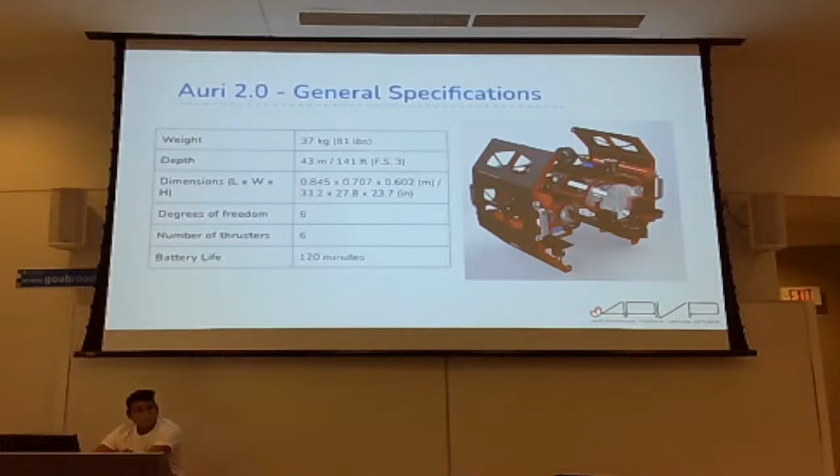How are the words? They're hard to see. Yeah? Okay, that was my main concern. Why is it turning red?

Wait, why don't we have a presenter view on this? Like on this, there should be a presenter view where you can see the notes on the side. Okay, yeah, but that's just the way you launch it. No, I tried to do it.

I'm gonna pretend you're presenting. I just want to check audio. This thing, presenter view. No, just like talking.

Oh yeah. Hi, my name is Lily. Yeah, you see how that shows up? That should be there regardless. Thank you. Hi, my name is Stevie.

I'm in my 4th year of mechanical engineering co-op, and I'm also the mechanical team co-lead this year. So these are our 2 robots, Auri, which is our existing competition robot, and Arctos, the new robot that we'll be building this year.

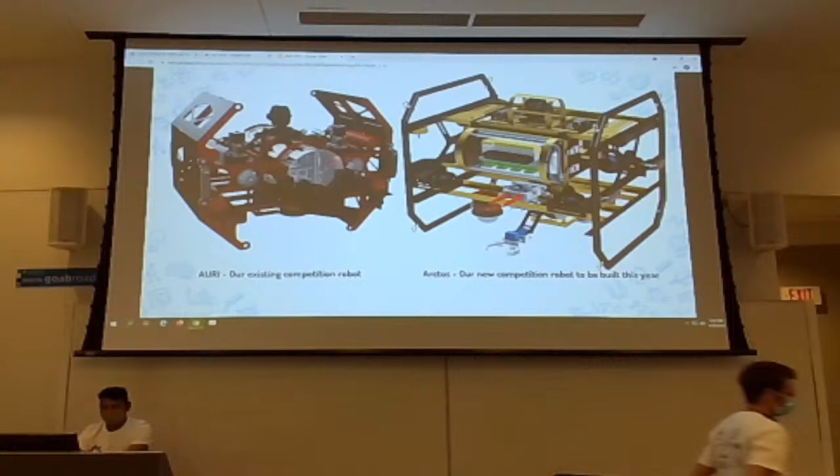Sounds okay, do you want me to continue? Okay, okay, so it's working?

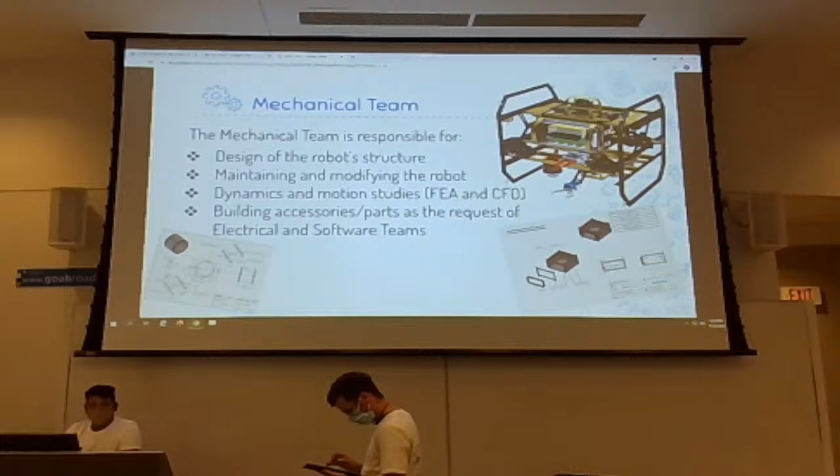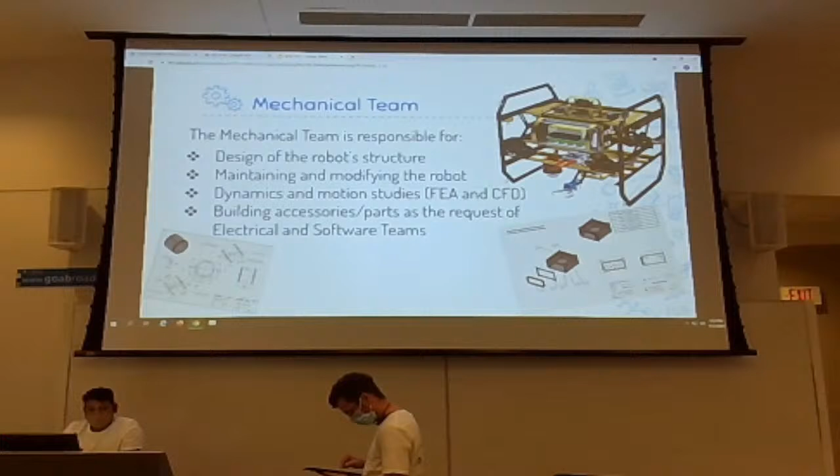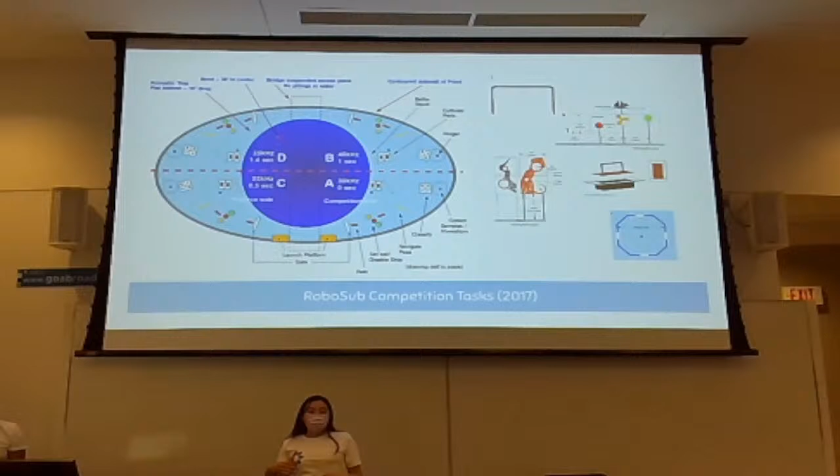The first task is always some sort of gate that you have to go through. However, every year it changes whether the gate is smaller on one side, bigger on the other, or there's 2 different colors. The next task is usually a buoy task. Some years it's been hitting a certain color in a certain order, or hitting 2 dice that add up to a certain number, or hitting the correct picture. So you can see our vision system is very important for that.

Afterwards, there are sonar pingers under the water leading us to the next task. Here we have a choice. We could either go one route to a pinger with a certain frequency that takes us to the torpedo task, where our robot would shoot torpedoes at targets. Or we could take another route and go more of a manipulation task, where we have to pick up an object from the bottom of the pool, or move a lever, stuff like that. To end the run, you surface in an octagon shape, and that ends your run. Or at any point, if your robot surfaces the water, your run is over.

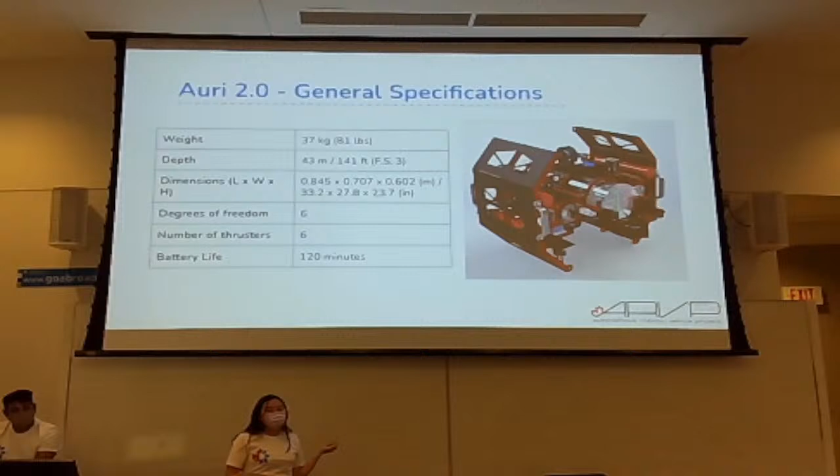So the robot itself, what do we build? This is our past robot. We are retiring it this year. This is Auri, you can see some of its specifications here. This year we're going to upgrade it and build a completely new robot named Arctos.

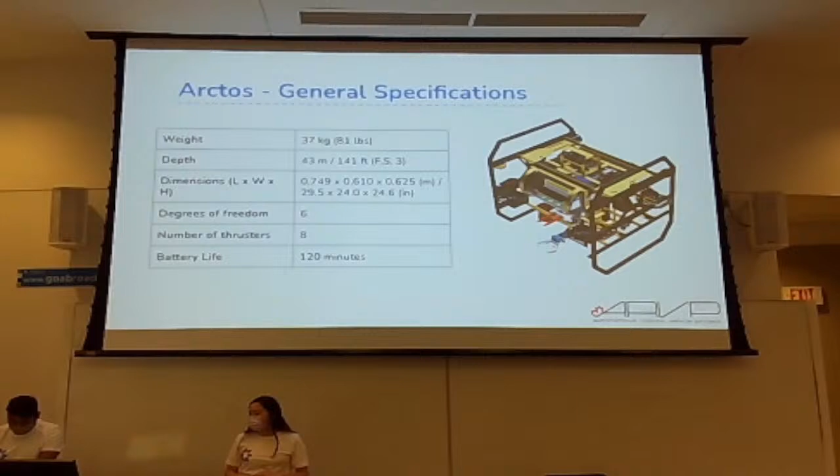You can see we upped the amount of thrusters it has, so it can go faster. It's also more stable.

So you can see that our club generally does pretty well. This is the results from 2019, and you can see that we placed 4th out of 58 international teams, which is pretty exciting. We are competing against teams like Caltech, MIT, Singapore, so lots of international big names.

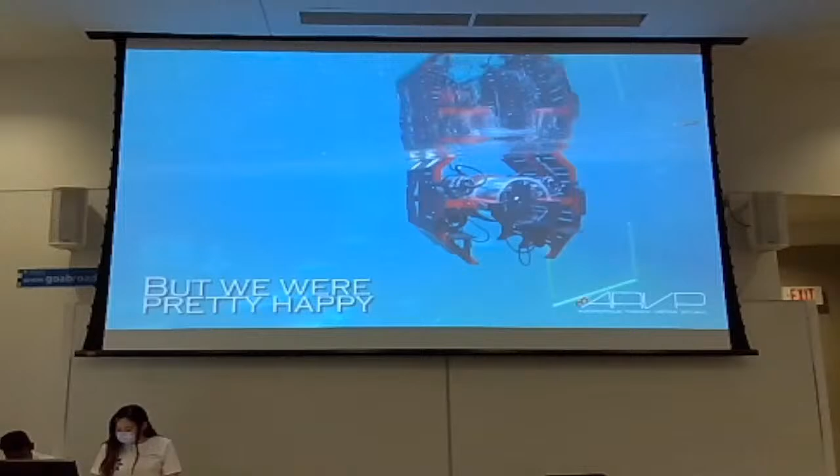Yeah, so you can see that was our run in 2017. We have done much better and done more tasks than what you saw there. So you can see this is our team at RoboSub 2018. It's a lot of fun.

So our robot is completely student designed and built, and we have 3 core teams: mechanical, electrical, and software. And then the backbone supporting all this is the admin team. I'm going to hand it off to the mechanical team to tell you all a little bit about what they do.

All right, awesome. Thank you guys. Thanks everyone for being here. Yeah, I can finish one of those. Just a second. Okay, press the arrow. Yeah.

All right, hello everyone. My name is Drew Del Cioco. I am one of the 2 mechanical co-leads for the 2021-2022 season. I'm in my 5th year of mechanical engineering here. I've been a part of ARVP for the past 3 years, one of the mechanical team leads for the past 2. It's been one of the absolute highlights of my university experience, and I would not trade any of these fine people or this club for the world.

I'm Stevie Demeray. I'm the other mechanical co-lead. I'm in my 4th year of mechanical engineering and 3rd year with the club as well. This is my 1st year as co-lead.

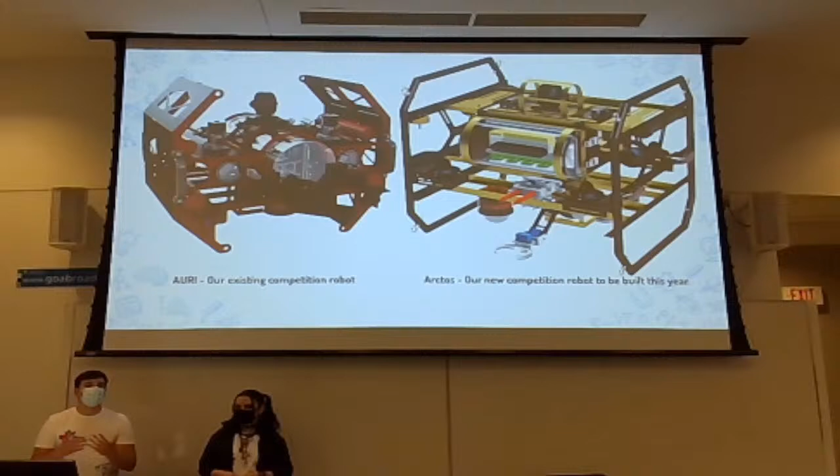To hopefully get this all working in time for competition next year, we also have a couple of other assemblies that are new this year: a cooling system, a balancing system, new droppers, new torpedoes, new everything. It's been super fun working on this for the last couple of years, getting this to the point where it's in now, I guess.

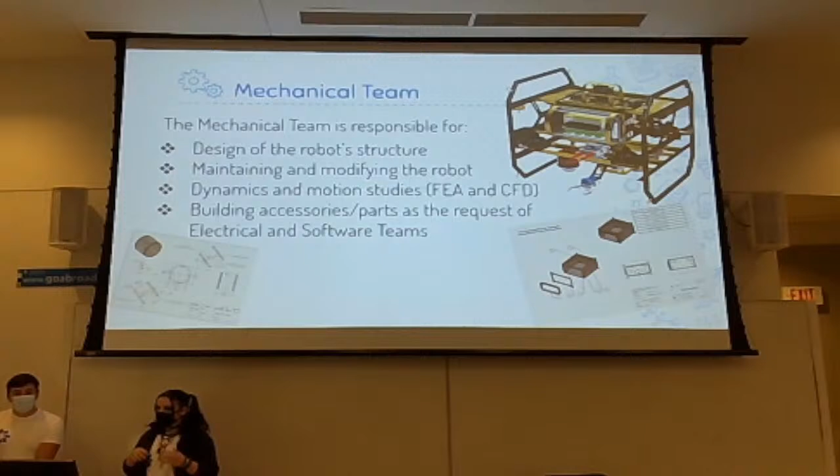So the mechanical team is responsible for the physical components of the robot, including the structure, such as the frame and hull, as well as the auxiliary components, such as the mechanical claw, the droppers, and the torpedoes.

Mechanical team is also responsible for maintaining and modifying current systems in means of continuous improvement to get the best competition results possible.

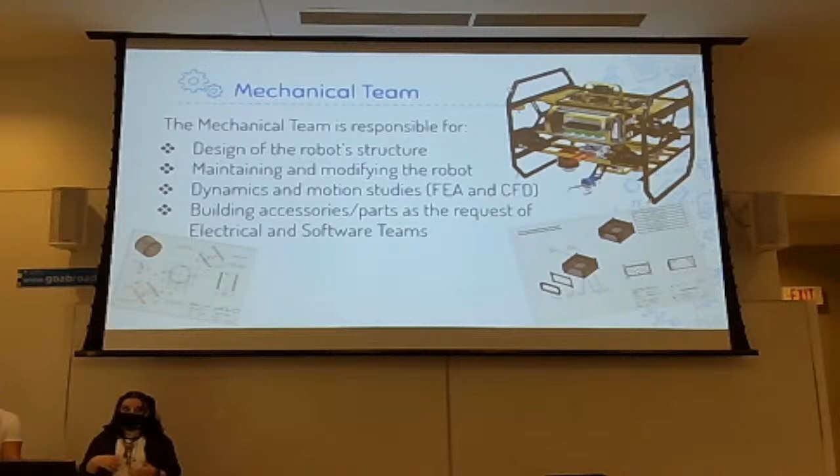So this year, our team is working on finishing up designing and building Arctos, including adding in a few new subsystems with the cooling and balancing system, and modifying some others like the claw and torpedoes.

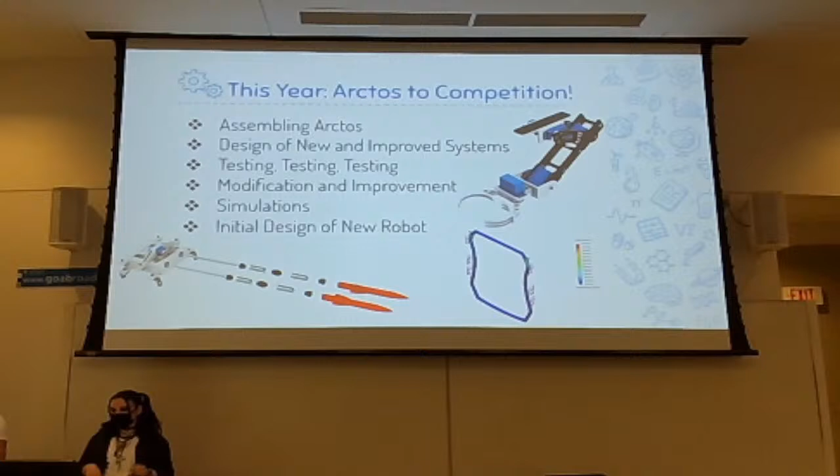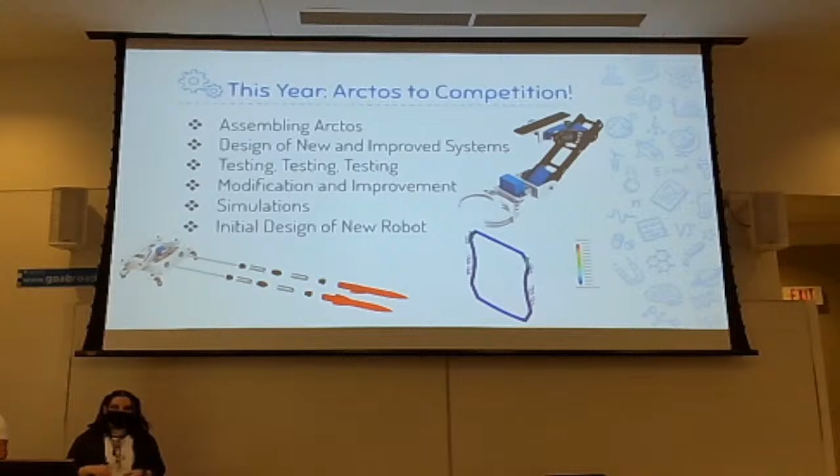We will also be putting the robot through a bunch of testing to iron out flaws, and we will also be starting the design on our next robot this year, later on this year.

Awesome, thanks. So guys, you're probably thinking, all of you guys have spent all of this time during your university career building robots and stuff like that, but I'm not sure that I quite like that. What am I going to get out of this club?

Of course, we have a great team of individuals that help each other with homework, that are able to hang out together, and I've made a lot of lifelong friends throughout my experiences with ARVP. But as far as your future engineering career, you probably want to learn something. You want to learn the fundamental engineering skills that will make you a successful engineer.

For mechanical specifically, oftentimes this comes down to stuff like SolidWorks. SolidWorks is very foundational. You take a big course on it, MEC E 265, and I can't even explain to you how many hours I've spent in industry just trying to build things on SolidWorks, trying to build very complicated things.

We also do a lot of manufacturing, using a lot of different manufacturing processes. This can be anything from laser jet cutting to 3D printing to anodizing, the whole works of it. It's very important that when you're designing stuff, you want to take into account how exactly this thing is going to be manufactured and what manufacturing processes can be used to get the most effective result possible.

We also really have a strong focus on the actual fundamental mechanical design process. This is going to be the thing that you're probably going to be spending a fair amount of time in your co-ops learning. I'll go over that probably on the next slide.

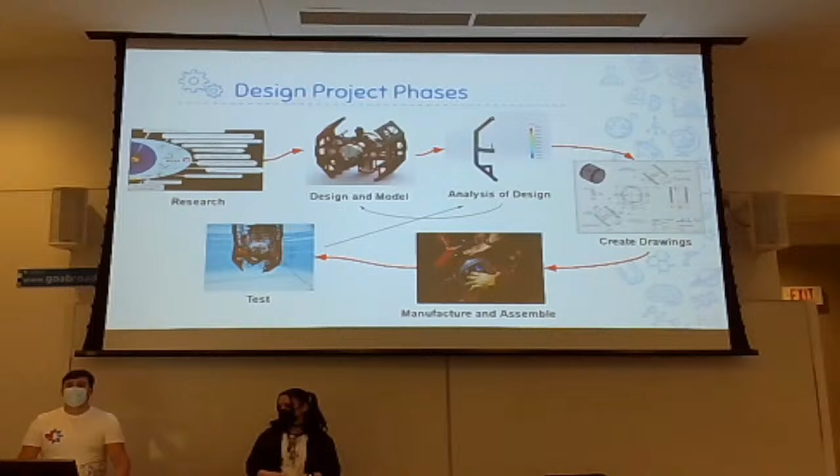Hey everyone, I'm Kirill. I did electrical nano, so if you have questions about the nano option in electrical, you can ask me. I'm also the electrical team co-lead with this guy. Hey guys, I'm Kang. I'm a third year electrical engineering student, and it's my second year joining this club, and it's been pretty great.

As part of the electrical team, there are three main components. You're designing and building printed circuit boards, which are those green boards you've seen with a bunch of components on them, for those who don't know. Then you're managing power and communication wiring, so that's physical troubleshooting and connecting. And you're also developing and maintaining code for microcontrollers, so firmware, for those of you who are familiar with that.

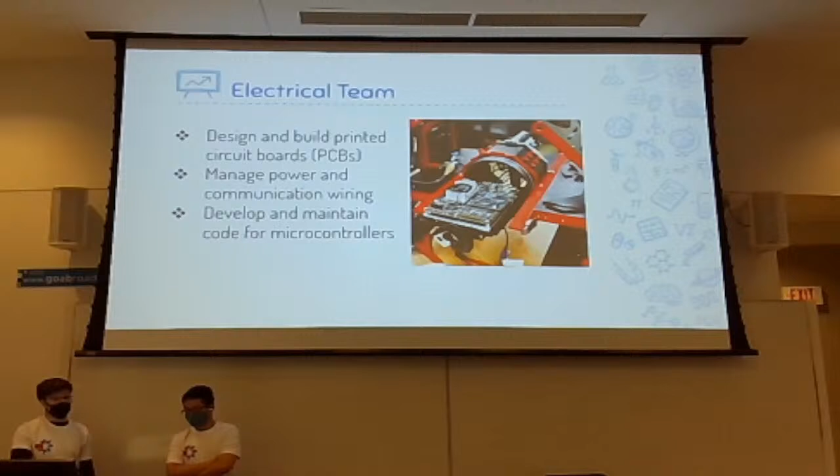For the electrical projects coming up this year, mainly we're focusing on assembling Arctos. We had a bunch of boards ordered before COVID, but then they never got assembled, so we have to assemble and test them before moving on to newer projects. We have one major research project, the underwater acoustic modem, which is worth a lot of points in the competition, but correspondingly is very difficult to implement. And we have one project right now, which is the Ethernet connection for our Sonar board.

We're also improving our documentation, which you're probably not that interested in. So this goes to learn embedded system design, basically integrating different boards, different controllers, electronic components, PCB development and assembly, firmware programming, and soldering. Soldering you probably won't use that much if you go into industry, but embedded system design is a major field of electrical engineering, so if you're interested in that, then by all means you should join.

The tools we use: Eagle, we use that for PCB design. We use LT Spice for simulation to make sure that the board works before we order the parts, and GitHub we mostly use for like backup. It's not like software where they use it for feature development, but you still get to use it.

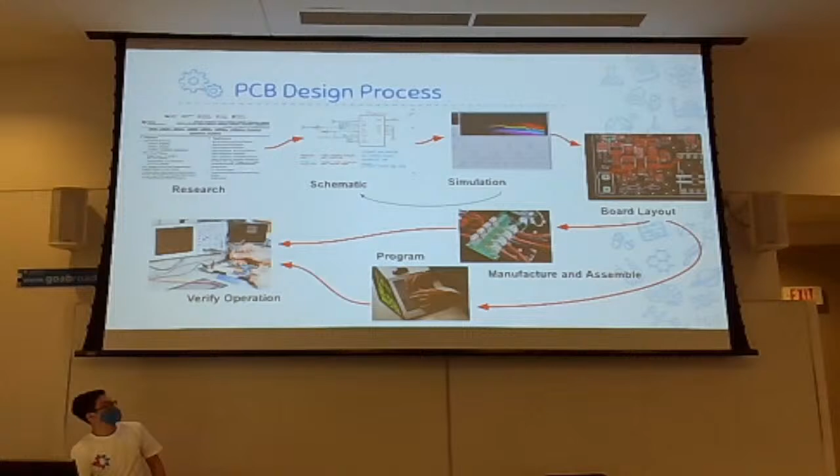As mentioned, we learned about the PCB design process, which I think is pretty interesting. So here are just a few steps in the whole process of designing a PCB. The first thing you need to do is research all the parts and components you will be needing as per your design requirements.

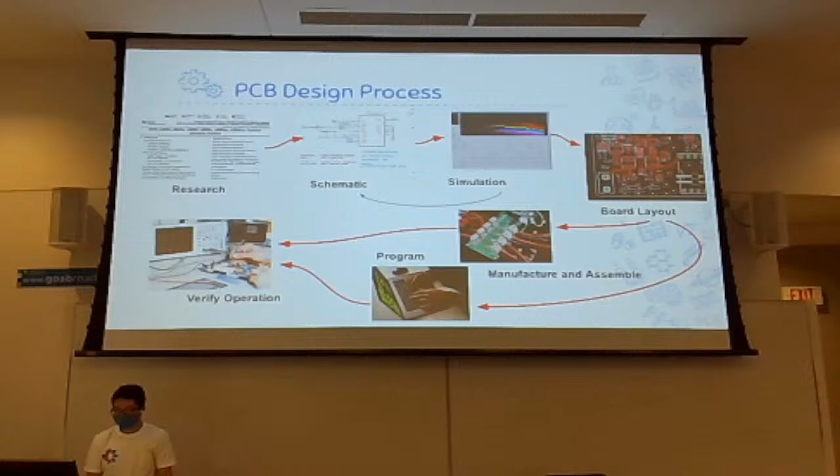After gathering all the information and parts needed, you move on to the second step, which is generating a schematic. A schematic is just a sheet on Eagle that you put a bunch of components on and make some general connections. Then after that, you do some simulation to test if your circuit works as expected or not. If it does, you move on to the next step, which is the most exciting step, which is making a board layout.

So here, just like placing actual connections and traces on it, it has to adhere to some signal integrity design rules.

After finishing the board, you send it to some manufacturers to manufacture it. Then after it's manufactured, you solder, basically putting a bunch of components onto it. After that, we verify some connections, operations, and functionalities. And then I guess the last step is just to program it as per requirement.

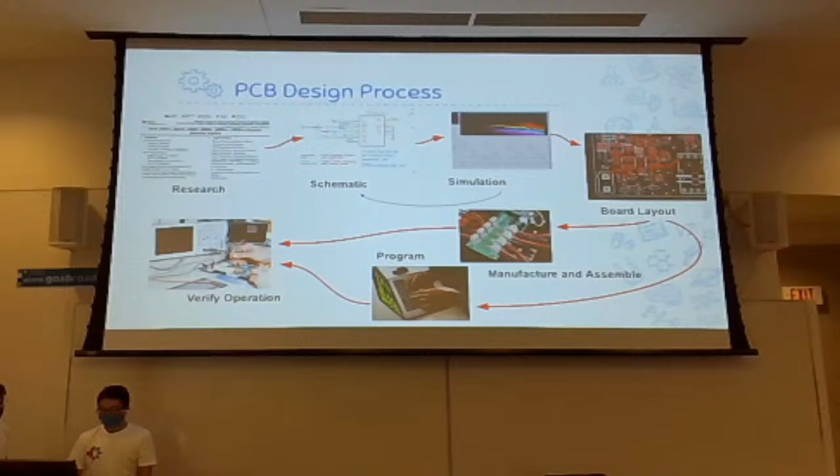So, yeah, now we're gonna pass it off to the software team to test it. Sounds very good.

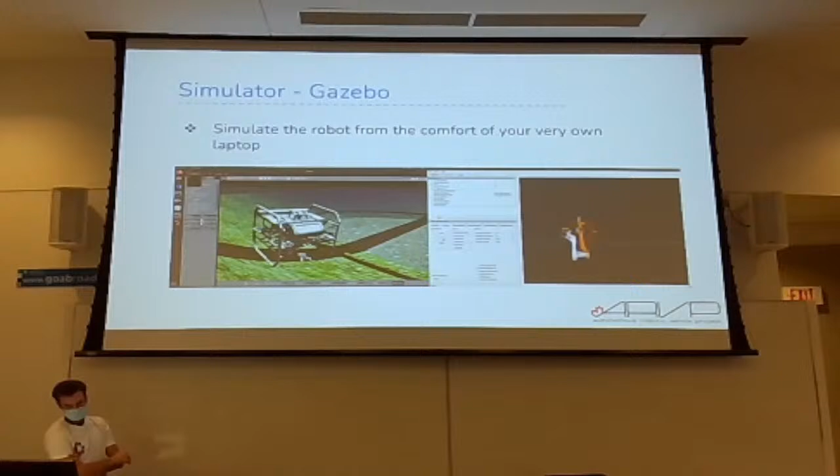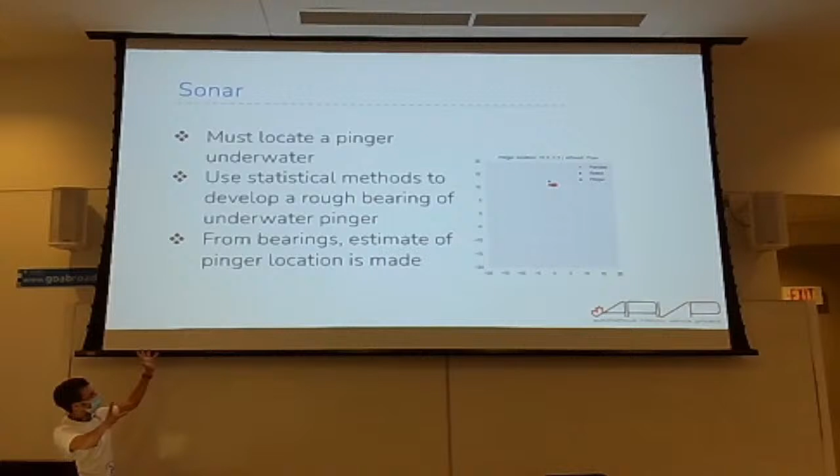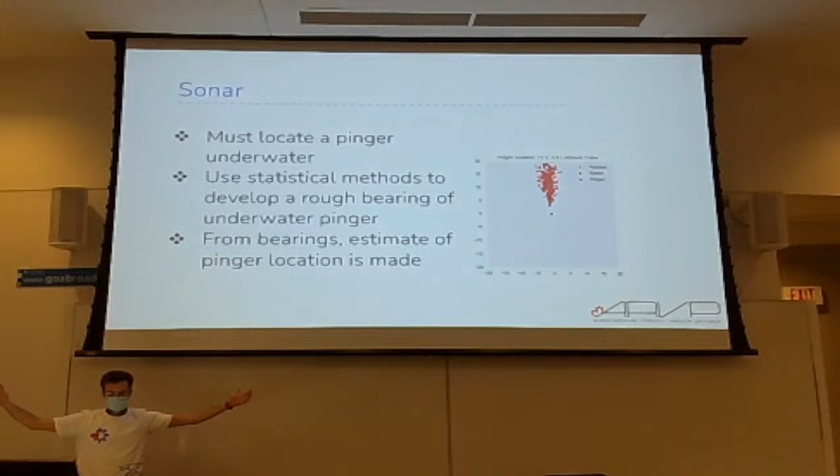One ongoing task we've been working on lately is detecting a pinger underwater. We've been using statistical methods to try and localize exactly where a ping is coming from in very noisy data. Here you can see a whole bunch of estimates, and then eventually it dials in on one spot. This has been working really well in the pool, but as soon as we use it in competition, where the pool isn't a nice perfect rectangle, we get a lot more noise, and we still haven't quite solved that problem for competition.

A hugely important part is localization. The robot has to be able to know where it is in space, its position, and its heading. We do localization by combining data from various sensors, like a pressure sensor, an IMU, and a DVL. The DVL gets the velocities on the X, Y, and Z axes.

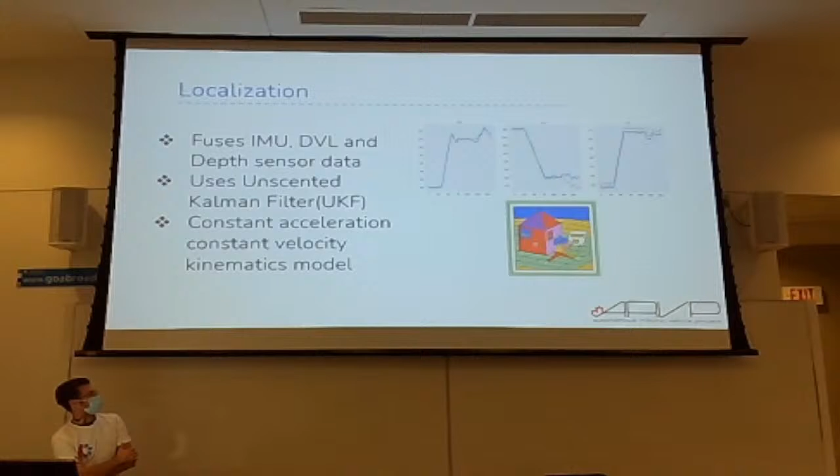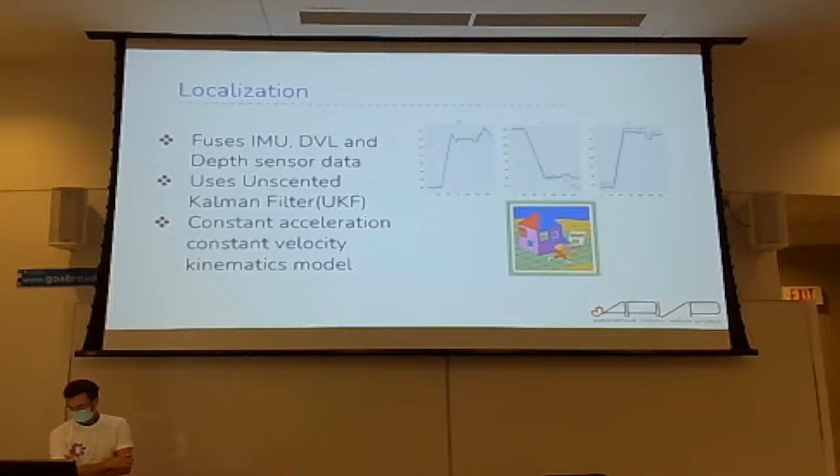So if you work in localization, you can expect to learn a lot more about sensor fusion and things like Kalman filtering.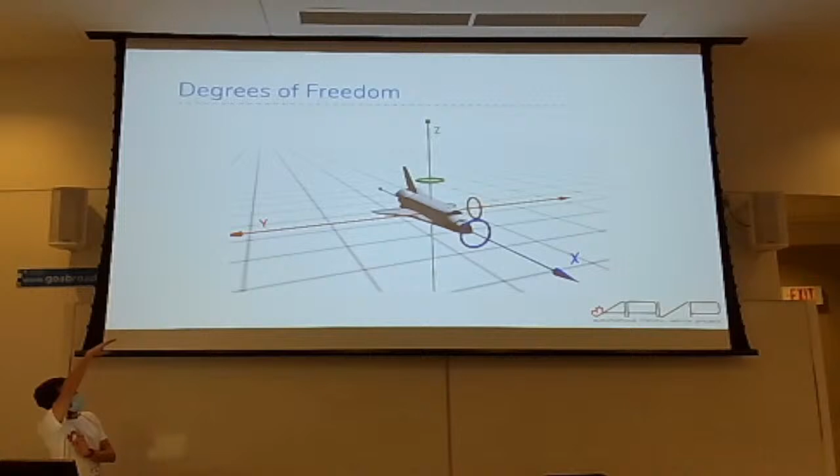So if you think about it, our robot is what you would call a 6 degree of freedom holonomic robot, so it can accelerate on any axis at once. Unlike an airplane, which would have to pitch up to accelerate upwards, we can use our thrusters to move directly up on the Z-axis. But this comes with a lot of problems in controls.

Simple PID controllers are not the easiest to use in these situations, and LQR controllers allow us to do more complex movements, like here where the robot's doing a barrel roll.

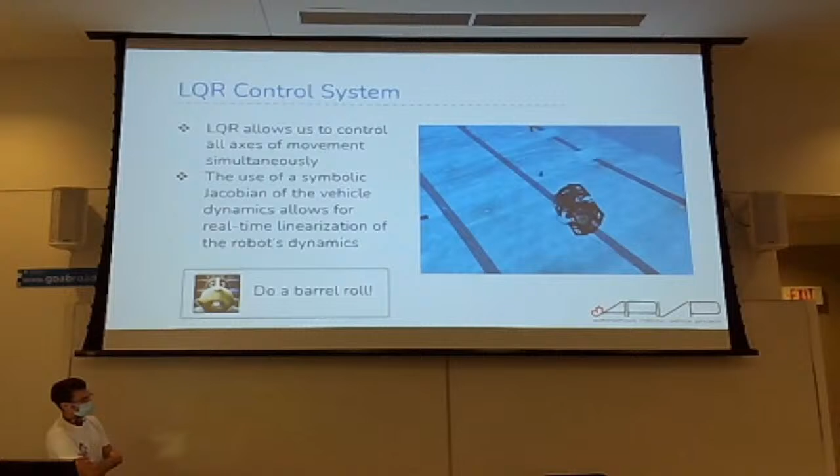All our software runs on the Ubuntu operating system, and all communication is done through ROS, the robotic operating system. It provides a handful of tools for data transfer, diagnostics, and communications. All of our production code is mainly written in C++, but we also use a little bit of Python and MATLAB. Whenever possible, we like to use the onboard GPU to do CUDA accelerated things for computer vision and computation.

And you might want to ask what tasks we have for this year.

Jokes aside, this is probably one of our most important years for software, because our existing code base has been in development for over 5 years, and a lot of the students that wrote most of that code have now graduated and moved on, working in the fields of robotics. It's getting to the point now where we're maintaining code, and that's not quite as fun.

It becomes more of a job and not a hobby, and we want everyone to develop the skills they need. So we've decided to completely upgrade everything to a newer version of ROS, which will involve rewriting the entire software stack. In my opinion, it's really exciting.

It's my goal to help build a strong foundation both for the robot and for the software members. Starting with the members, that foundation is going to be based around education, providing hands-on training with robots. And for the robot itself, that foundation is going to be built upon easy to read, production level code with multiple tests and superb documentation.